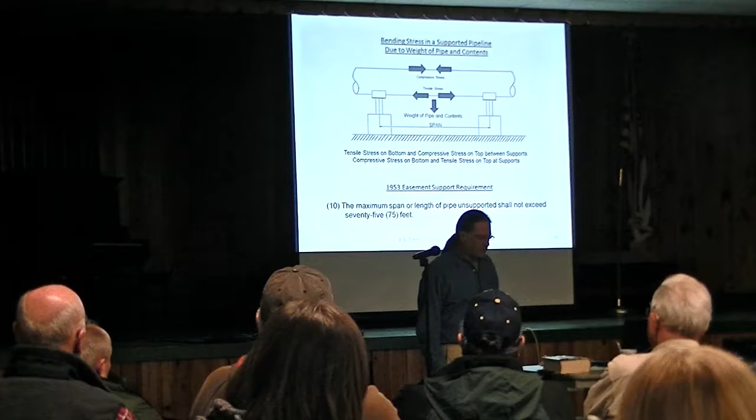Because the pipe is heavy, it has to have support. In the 1953 easement, I was very surprised to find that somebody who really knew pipeline engineering had been involved in this, because they set a limit on how much of this pipe could be hanging in space. They said 75 feet of the pipe. Why did they choose 75 feet?

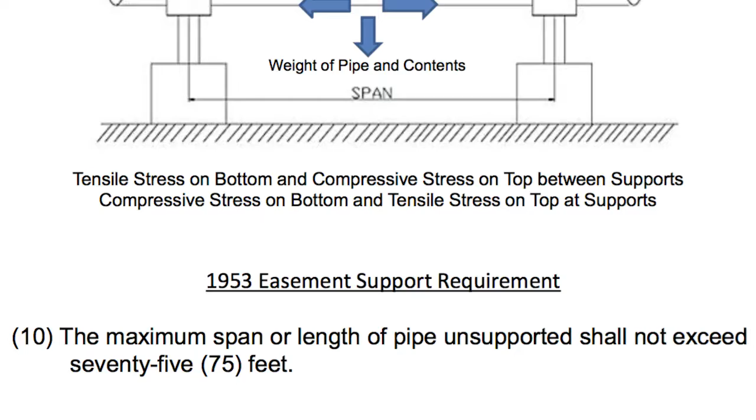Let's talk a little bit about the pipes before we get into that. I've got to thank Enbridge a great deal. I'd have been pretty dead in the water trying to figure this thing out if it hadn't been for this report that Enbridge published in 2014, where they released some data on this pipe. This tells me everything I need to know about it.

The pipe we're going to be talking about is here, the two pipelines that go under the Straits, and this stretch here, which in Enbridge talk is MA to BC, Mackinac City to Bay City, or here, this is from Iron River to the Straits. What you notice is that it's all 30-inch diameter pipe here and here, 20-inch under the Straits.

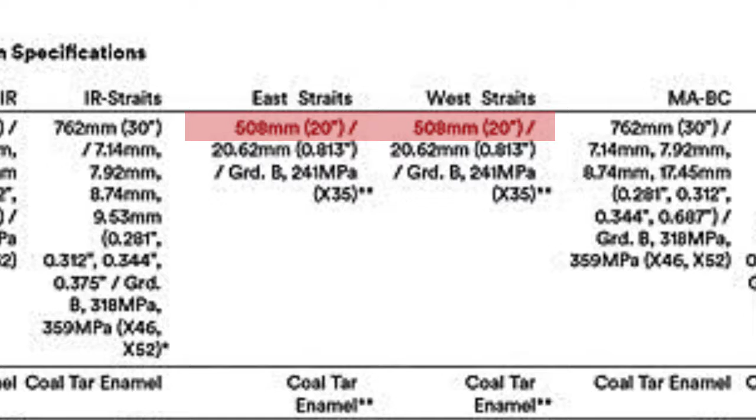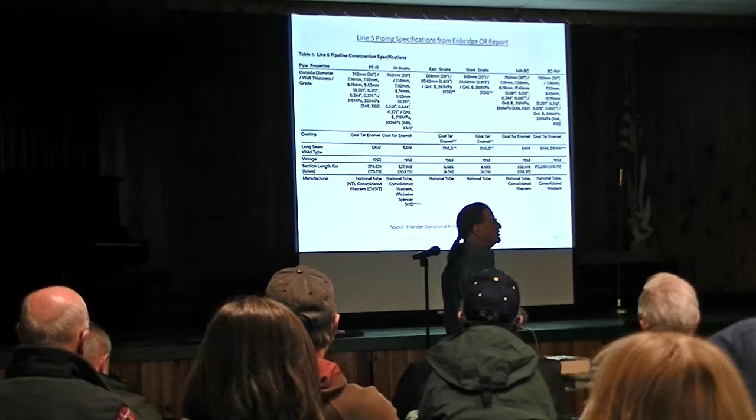The Straits pipe is just very strong, 13/16 wall thickness. You wouldn't think there could be any problems with that. Why did they make it that thick? Very simple reason: this pipe isn't held to the bottom. It needed to be heavy enough so it wouldn't float up. There have been pipelines that have floated up, and engineers find that very embarrassing.

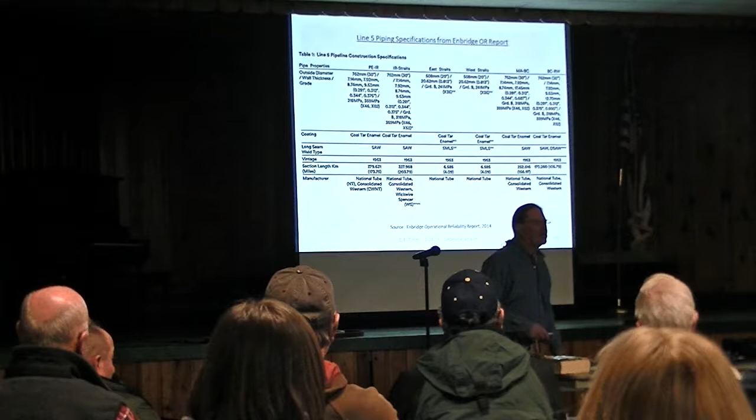So the State of Michigan and the engineers came up with a minimum weight for this 20-inch pipe of 160 pounds a foot. That turns out to be 20-inch pipe with 13/16 walls, and it's that thick so it won't float. It had nothing to do with engineering strength considerations. They could have been much thinner.

The rest of the pipe, all 30-inch diameter, but many wall thicknesses: 9/32, 5/16, 11/32, 3/8. And then the kind of pipe - this tells me exactly what metal it's made of. Why all the different thicknesses of pipe? Why would you do that?

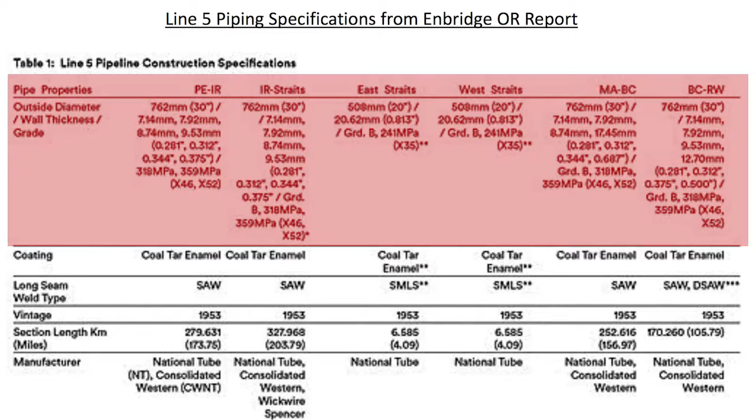When you build pipelines, a lot of them are built with what's called telescoped construction, and this pipeline appears to have been built that way. If you have a pump station here with a lot of pressure, and this is the other end where the pressure is low, the pipe doesn't need to be thick here - it needs to be thick here. So typically they built this pipeline telescoped like that. It's all 30-inch OD, but with different wall thicknesses.

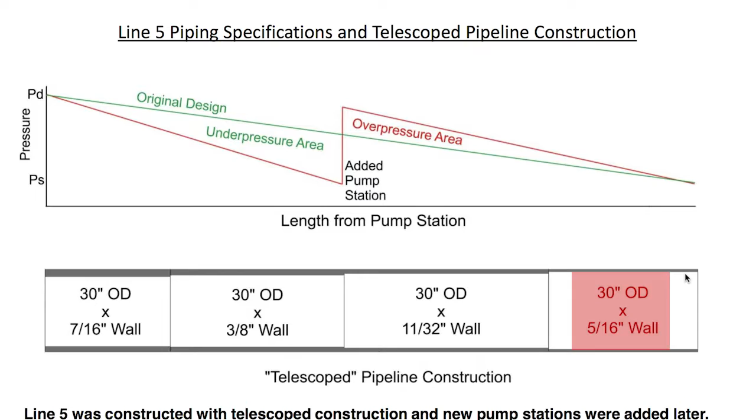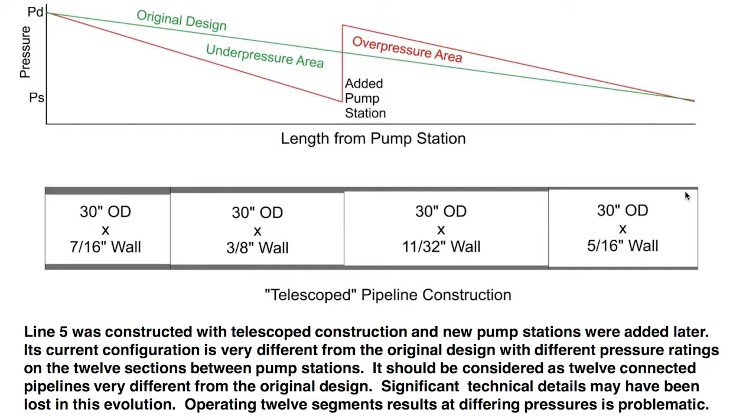It was originally intended to have 4 pump stations, if you remember, and between those there were 4 telescope sections. After that, many pump stations were plugged in - we've got 12 pump stations now, all hooked to pipe of different wall thicknesses. This pipeline should really be considered as 12 separate pipelines between the pump stations.

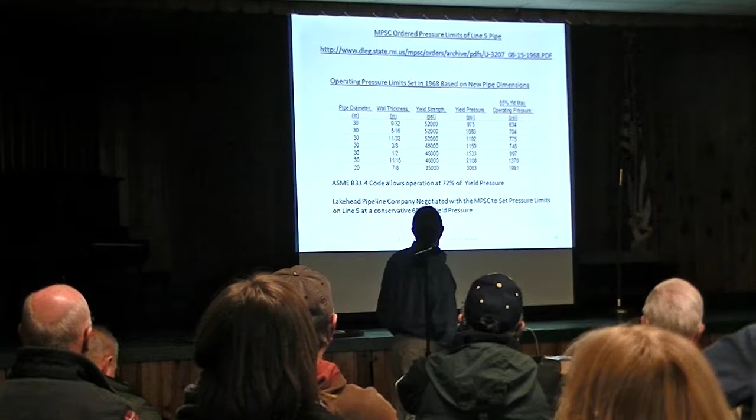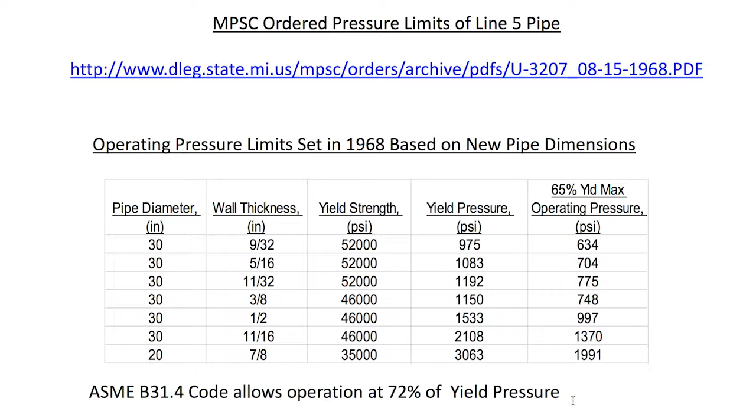I was able to learn about what kind of pipe went where. If you want to actually get into this, this is the address of the 1968 MPSC order, the last time they took a hard look at this thing and set rigorous pressure limits on it. The MPSC set discharge pressure limits for all these pump stations.

The ones we're interested in, Naubinway runs at 698. Some of these are more, some are less. The reason why is they're pumping into pipe of different thickness.

I calculated independently of what the MPSC recommended or mandated as the maximum pressure, because by agreement Lakehead Pipeline agreed that they would run this pipe at a maximum of 65% of the yield pressure. What's the yield pressure? That's where the steel will go from being elastic to being plastic, and this pipeline will start to blow up like a balloon. Not something you want to get to. You have to stay below that pressure, so the MPSC regulated them to discharge pressures at 65% of that yield pressure.

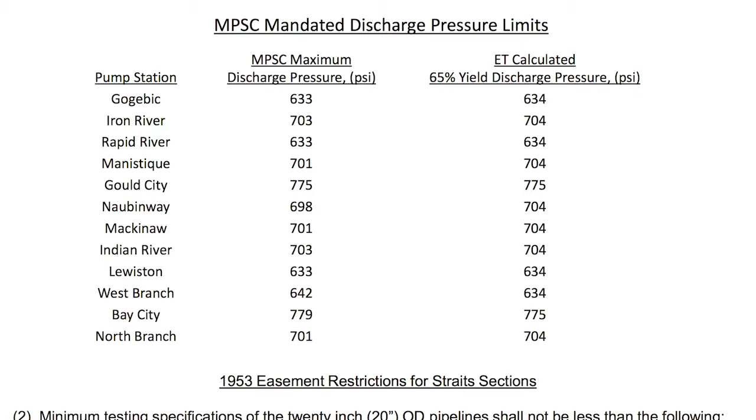My calculations agree very well with what the MPSC regulated. So I think I understand both how the pipeline was designed and why the limits were set as they are. The easement has separate restrictions for the sections under the Straits, and that's the 20-inch pipe.

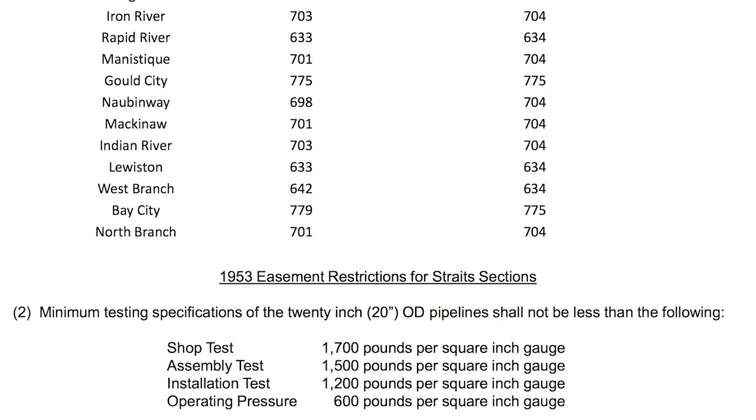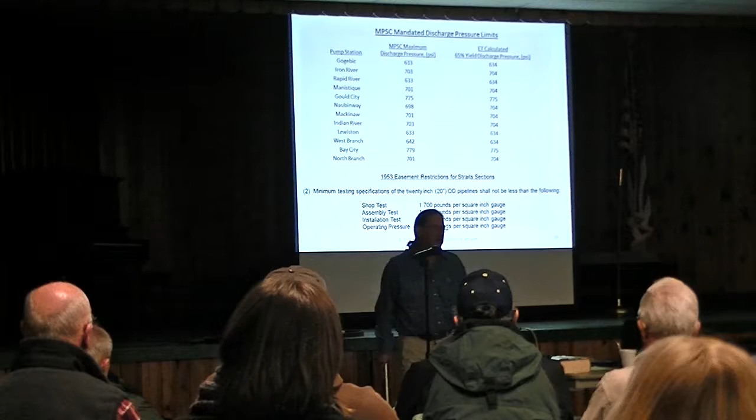Now I've got a couple things I want to pass around here. There's two kinds of pipe used in this. All the 30-inch pipe used in the pipeline is seamed pipe. It's made by taking a sheet of steel, rolling it into a round shape, and then welding up a seam. This is typical of the seamed pipe that's almost everywhere in the pipeline.

Cough. Fortunately, my wife gave me one.

This is what kind of pipe the rest of it's made out of. This is seamless pipe. It's much more expensive, much heavier duty stuff.

The way it's made is they take a hot billet of steel, drive a big punch through it, make a hole, and then start rolling it up into a single piece of pipe. It does not have a longitudinal seam, which is where a lot of pipes break.

It does have the girth welds. The pipe under the Straits, I'm told, came in 27-foot lengths, and I forget how many exactly. There's something like 4,000 girth welds in the pipe under the Straits. They were all X-rayed. There was a lot of talk when I first became aware of this.

People were talking—this is when Enbridge was increasing the capacity of the line. Everybody was worried about the pressure in the line. Is the pressure too high?

So, using the pipeline handbook, I recalculated the pressure. What you have here is the results of one of my calculations. I'm not going to go into this very far, but what it shows is for the flow rate of 540,000 barrels a day, I did calculations for 4 different kinds of oil that could be pumped through it. This is without any drag reduction, which Enbridge does do.

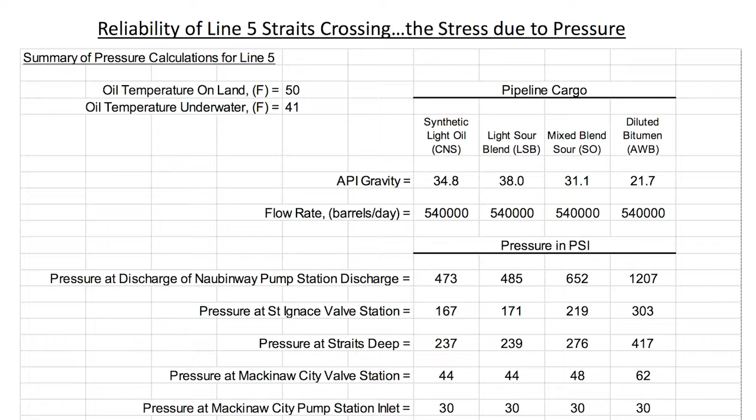But you have to remember, those limits set by the MPSC were based on brand new pipe, not rusty pipe. What I found is that if you look right here, what's the highest pressure in this line when it's running? It's limited by the easement to 600, but I calculate pressures like this—very low pressures, really, considering the pipe.

The other important thing is the calculation of how much horsepower it takes to run this thing. These fit in with what I know of the pump stations—they're typically around 6,000 horsepower per pump station, a little more perhaps.

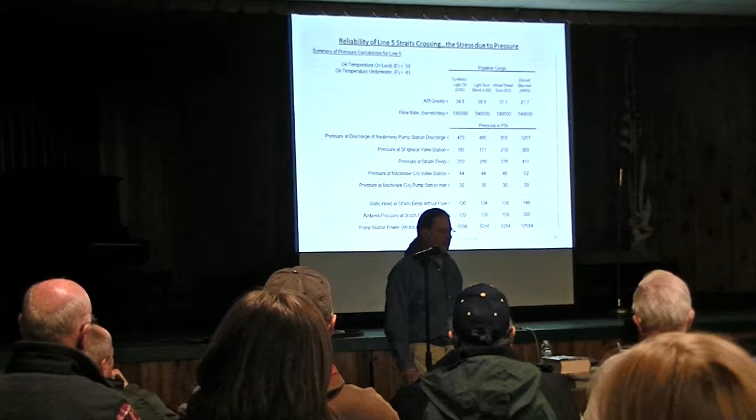What's this case over here? Well, this is the case of dilbit, diluted bitumen. That's what was in the pipe in Marshall, caused this. That was so difficult to clean up.

So the question was, can they pump dilbit through this thing? And I took a look at it, and as this calculation is done, the answer is absolutely not. The discharge pressure at the pump would be way above the limit, but even more importantly, they haven't got 13,000 horsepower at that pump station. Could not pump dilbit as that calculation is done.

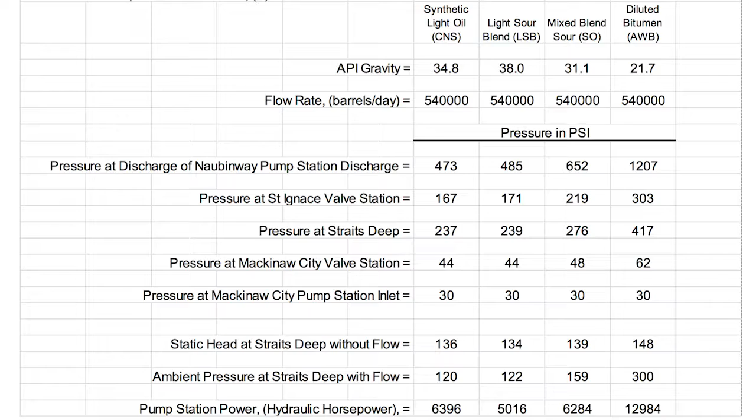So then, as engineers will do, we compute a few other scenarios. Is there any way Enbridge could pump dilbit through this pipe? They couldn't do it.

Can line 5 transport dilbit? I was surprised once I played with it. Yup, it could be done.

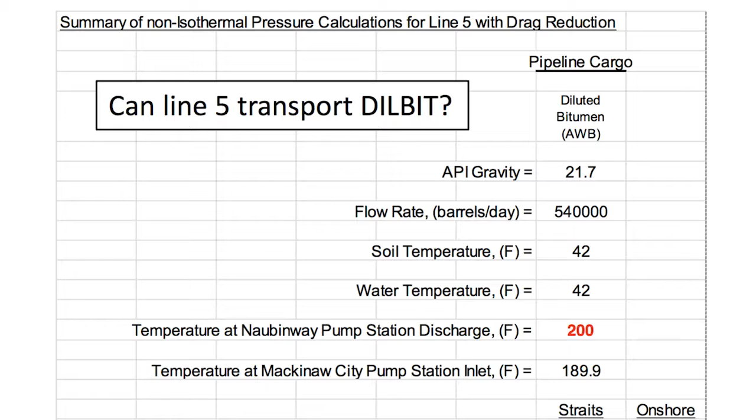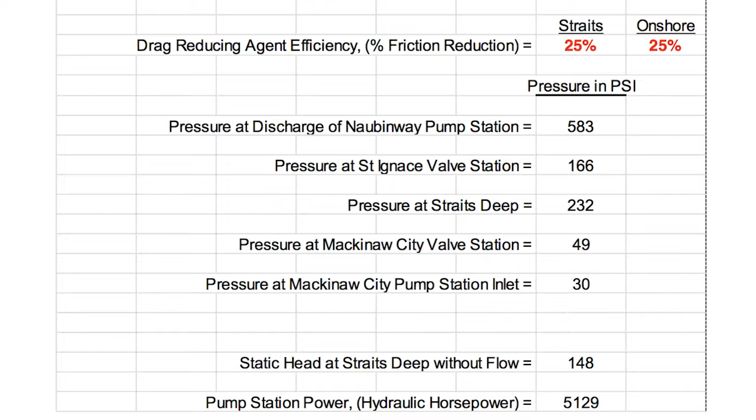What would they have to do to pump dilbit through the pipe? One is they'd have to heat her up. That's done—Keystone XL was designed to run just about the boiling point of water. So if you heated this oil to 200 and could get 25% drag reduction from your drag reduction polymer, then all of a sudden we're down at 5,000 horsepower and the pressures are within the limits of the regulation. So line 5 could carry dilbit if you wanted to push it to the extreme.

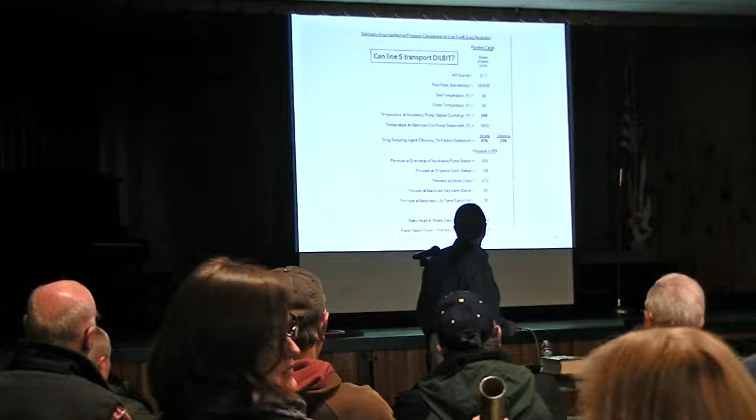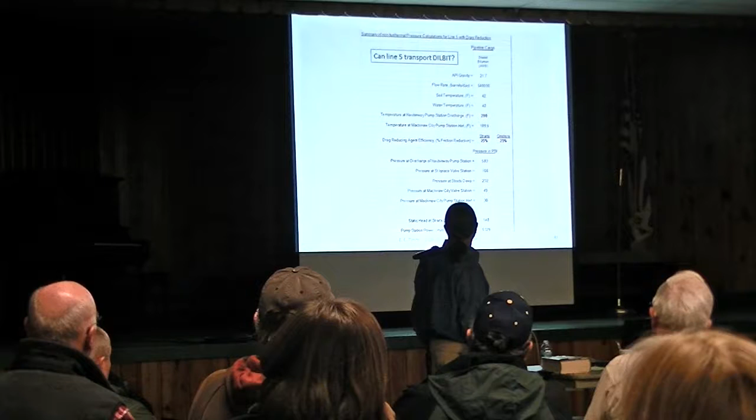I don't think that anybody that's a reasonable operator would consider putting heated oil on a line that was designed for non-heated oil. So I just really don't think that carrying dilbit in this line is a reasonable possibility. I'm very confident that what Enbridge has done as far as operating pressures in the line is all fine. I can't criticize them at all for that. That's basic engineering stuff, and that's the way it looks like it works to me.

Now, where does this get complicated? There were two things that the engineers that designed this thing didn't really know. And what were...